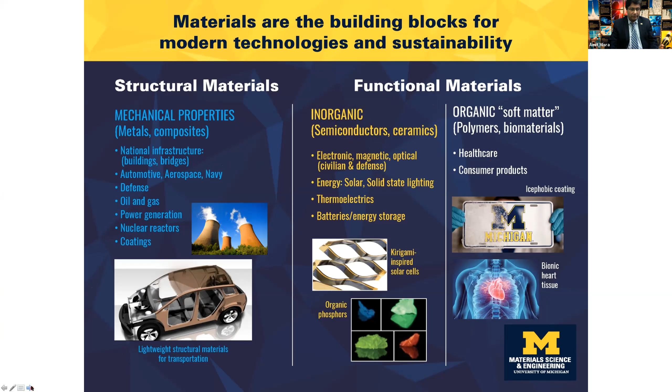So materials make a broad impact. Structural materials, metals and alloys, continue to be a hot topic of research for new kinds of developments in the field. If you just focus on the metallic alloy area, you will see high-tech applications wherever metals, coatings, and alloys are used.

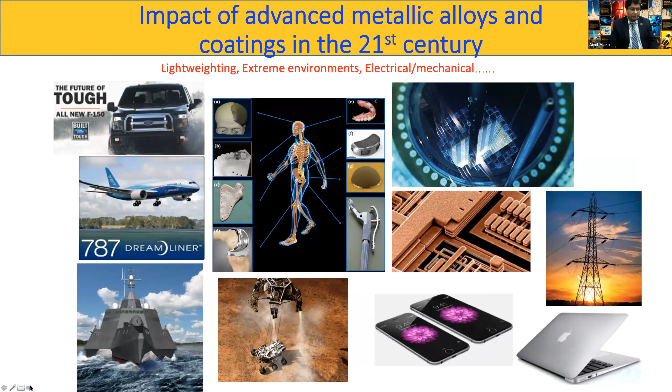That requires new kinds of research all the way from electronics to nuclear to biomedical to space to transportation. All of these areas require lightweight, high strength, damage tolerant types of materials, where microstructure and the role of microstructures becomes the key factor, which is the motivation for this kind of research.

What are some of the scientific issues? One good way to bring yourself up to speed, if you are not familiar, is that in any topical area of research there are these basic research needs workshop reports that DOE Office of Basic Energy Science puts out.

These are written by experts working in that field, academics that get together every few years or so. The relevant reports to the research I'm doing will be these, but you can Google DOE BES workshop reports and it will take you to a site where, in whatever area of research you're working on, you should be able to see the current hot topics of research and the fundamental scientific issues driving the kinds of research that DOE BES and NSF fund.

So for metallic materials, it is things like: how do you make structures that are strong and still lightweight? How do you make a hard matter heal damage or defects? And how do you make it resistant to failure under extreme conditions?

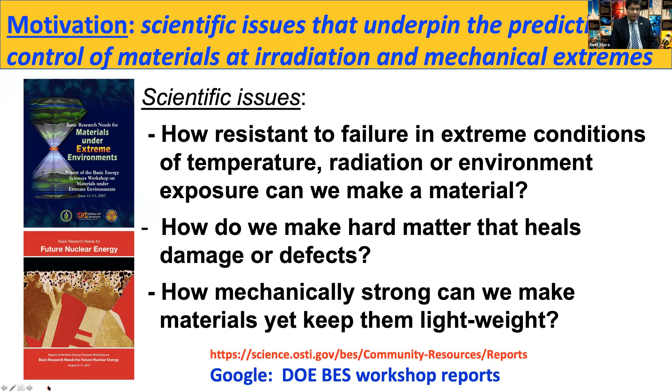A lot of metallic alloys can easily be fabricated, but once you put them under extreme conditions—high temperatures, radiation, or corrosive environments—they can fail in unpredictable ways. So there is still a lot of scientific basis needed to design microstructures for a tailored response that would enhance functionality in these extreme conditions.

So this is my outline. There'll be a little bit of background on microstructure and mechanical behavior relationship, sort of strength of metals 101, a few slides. Then I'll get into talking a lot about hierarchical structures. That will be my focus, different from some of the work I've presented before, made by physical vapor deposition in the form of thin films and coatings.

The second example is laser rapid solidification, relevant to additive manufacturing, where I'll give examples of how to make nano hierarchical microstructures in aluminum-based eutectics. And since there are students joining, we'll also throw in some quizzes as we go along, just to make it fun and interesting, hopefully.

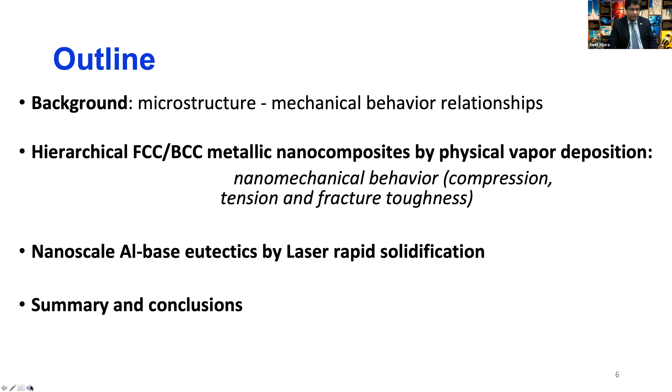So when we start with metal—this is outside my office window, there's a metallic structure, 3 cubes, and I work in cubic metal, so I always look at it and point to students. You can look at a macro structure on the surface of a metal, the way it is polished and prepared. But really what determines the property of a microstructure of a material is defined by things such as the grain size and the grain orientation.

So this is a textbook type of placeholder microstructure of a metal, where the different colors represent grain orientations, and this is a scale bar. This is a microstructured material with grain size in the tens of micrometers regime.

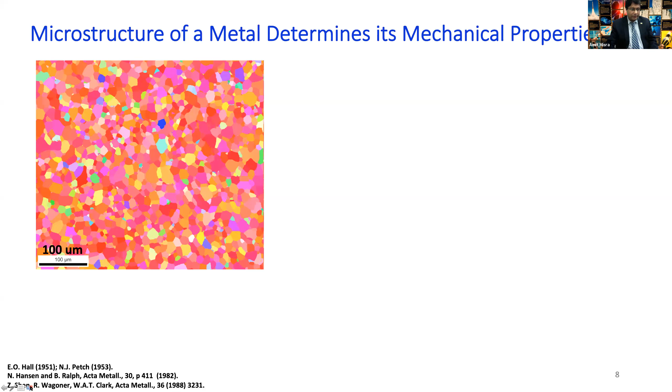And by this model known as the Hall-Petch scaling law, it is known that the yield strength of this microstructure will scale with 1 over the square root of the average grain size. Using that, we can get an idea of what the strength of a metal will be.

This is an example for copper. If you plot the strength as 1 over the square root of the grain size, you get a linear relation with slope K, which is the Hall-Petch slope. And you get a sense of what the strength numbers will be.

Typically on the order of a couple hundred megapascals, if the grain size is on the order of tens of micrometers, which is where most typical metallic microstructures are.

The reason for that is based on dislocation theory: crystals deform by moving dislocations on crystallographic planes. Dislocations tend to pile up at grain boundaries because there is a crystallographic misorientation. So the smaller the spacing between grain boundaries, the stronger the material becomes, because the grain boundaries are obstacles for shear or glide of dislocations.

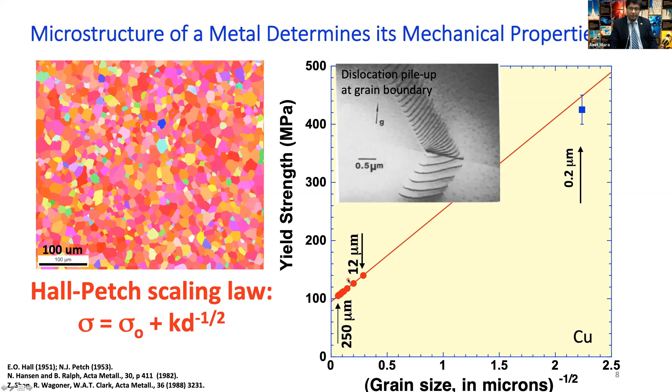Using this kind of idea, this has been used to refine microstructures to increase the strength. But of course, there are limits to what one can do with this. So I'll give you an example of how you can have a composite microstructure. The previous one was a single phase microstructure, like pure copper.

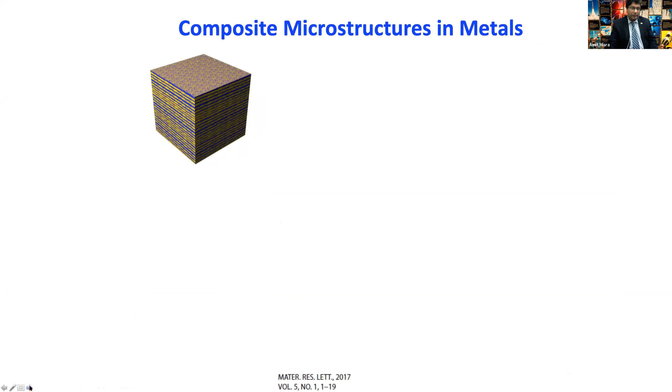In this case, you can create a layered, nanolaminate type of structure by layering 2 different materials. There could be both metals, or one could be a metal and one a non-metal, creating a composite microstructure. This is an example from copper niobium—copper is face-centered cubic, niobium is body-centered cubic.

You see this superlattice kind of structure formed by physical vapor deposition, where each individual layer can be controlled by deposition. This is on the order of a nanometer, but by deposition we can make it whatever dimension we'd like.

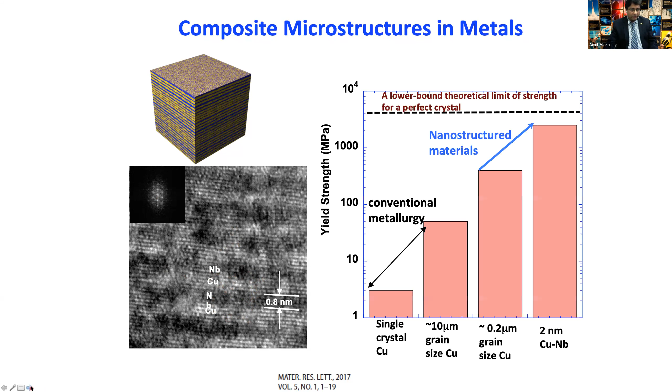In copper-based materials, that is extremely high strength, because you can normalize it with the modulus, and you'll see it's beginning to approach within a factor of 2 or 3 of what would be a lower bound estimate of the strength of a perfect dislocation-free crystal.

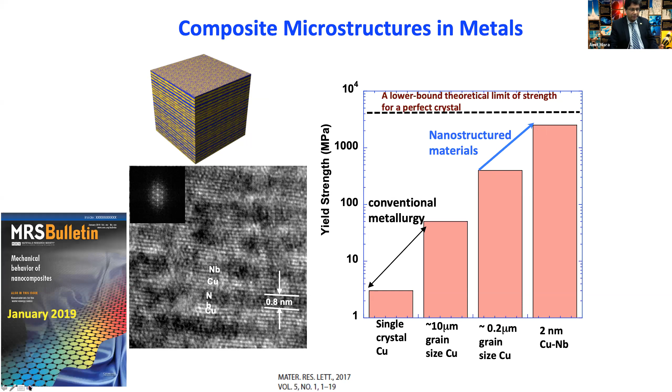So with this approach of making composite microstructures with finely spaced interfaces that block shear by dislocations, one can make super strong materials that are resistant to plastic deformation. Some of this you could also read in more detail in the recent MRS Bulletin, January 2019 special issue.

Going beyond high strength, there are many other properties discovered by virtue of these interface boundaries. You can suppress dislocation cell structure formation and obtain high fatigue strength. These boundaries can soak up point defects—attract, absorb, and annihilate them—resulting in materials resistant to radiation damage. You can also maintain the crystallography of the interface during plastic deformation.

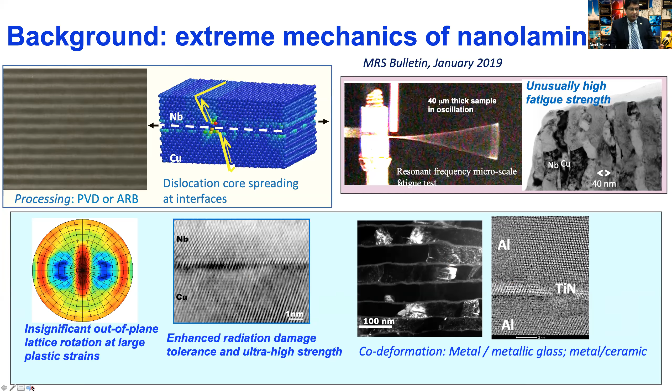Extend these ideas to metallic glasses or ceramics sandwiched between nano layers of metals and get high strength and high deformability. There's been a field of study looking at these kinds of laminate microstructures, utilizing the nanoscale dimension as well as the properties of the interface.

One limitation is that as this material becomes so strong, at the point of yield—this is a 3 nanometer multilayer deformed inside a transmission electron microscope in situ—you saw that a shear band nucleated at the point of yield, creating a huge load drop. This means that when the layer thickness is only a few nanometers, we have dislocations sliding across the interface, so once plastic deformation starts, it localizes where it starts.

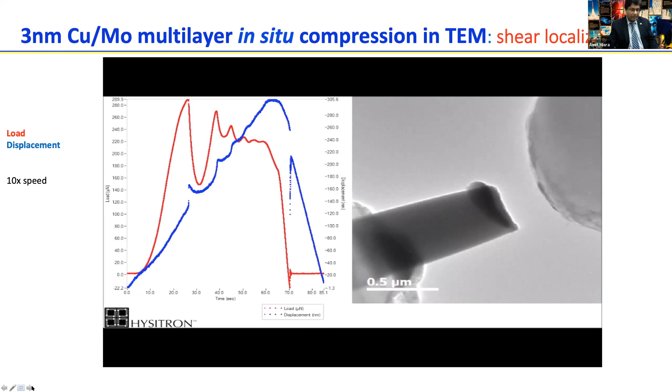That shear localization limits the ductility and toughness. To summarize, what we've known from the literature is that you can create an AB, where A and B can be two different metals or alloys, as a nanolaminate microstructure, and get very high yield strength, but the strongest, finest microstructures lack uniform deformation—they lack ductility and toughness because the mode of deformation becomes shear localization at yield.

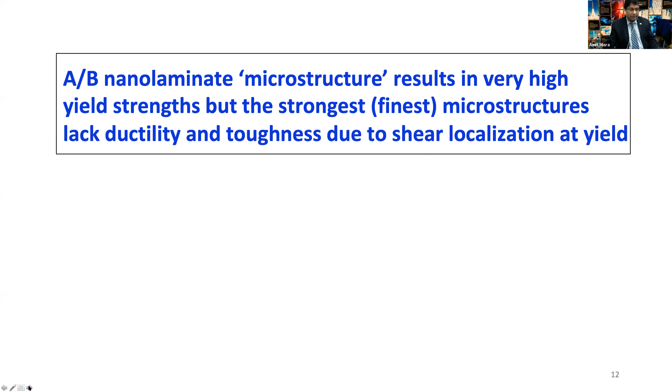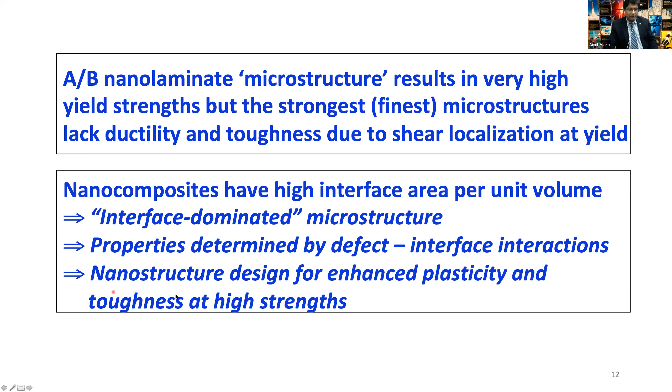We also recognize that these nanocomposites have high interface area per unit volume, so we have to think of this microstructure differently. Instead of a size like grain size or layer thickness, we have to think of it as microstructure that is interface dominated, because it's mostly interfaces, and the properties are determined by this defect-interface interaction. This means there's a need to design these interfaces to enhance plasticity and toughness while maintaining high strength, which is a new direction of research in this field.

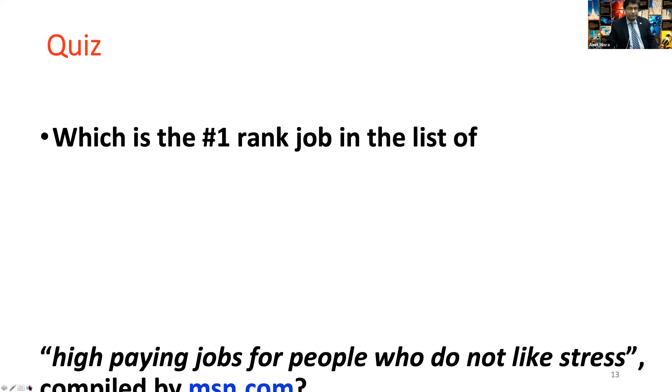So this is my first part, and at this point I will throw in a quiz just for fun. All the students who are listening, you can write down the answer in the chat.

What is the number 1 ranked job in the list of high-paying jobs for people who do not like stress, as compiled by MSN.com? This is just for fun, so hopefully while I get a sip of water, you can think of and write in the chat what you think the answer is.

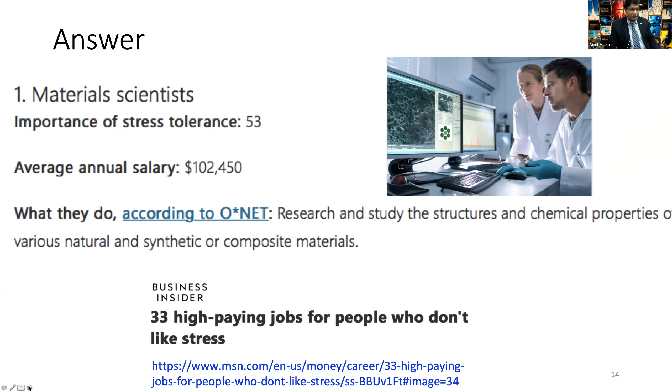So we have one response. Okay, you can also Google it. If you Google MSN.com, high-paying jobs for people who don't like stress, number 1 is material scientist. So you could go read more about it and feel proud that you are a material scientist by this criterion. This was released this year, ranked at the very top. This is something we show to the students. So hopefully with that, you can be energized to stay awake for the rest of the presentation.

So now I will talk about the next part. I introduced the idea of nanolaminate microstructure. I will now introduce the idea of hierarchical microstructure. What do we mean by hierarchical? How is it made and what interesting properties does it have?

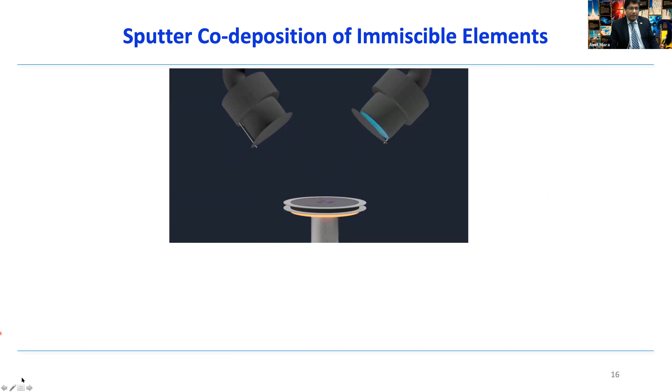To make that structure, we use a different approach. Instead of layer-by-layer deposition of A, B alternating, we mix A and B together—co-deposition—done at elevated temperatures using elements that are immiscible, such as copper and niobium, and similarly others. If you force these immiscible elements to mix at elevated temperature, there is instantaneous demixing, which can produce other kinds of morphologies beyond just the regular laminate geometry we get by sequential deposition.

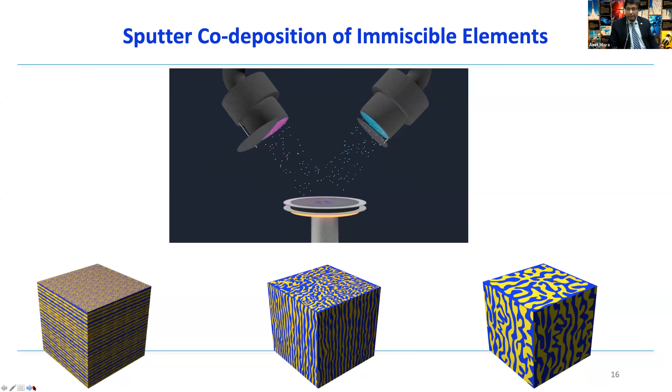The model systems we'll use are copper as an example for FCC, paired with a body-centered cubic element—such as niobium, molybdenum, tantalum, tungsten, chromium, vanadium, or iron. All of these are body-centered cubic elements, and many are refractory elements. The key is that all of these, if you look at the phase diagram of binary copper with iron, or copper with moly or niobium and so on, are immiscible and have positive heat of mixing.

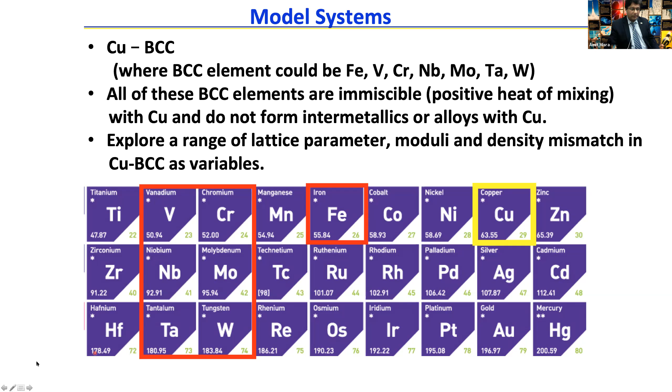So there is no alloying and no intermetallic formation. You can take any binary pair and mix it at elevated temperature, and it will demix instantaneously and create some kind of morphological pattern. The question is, what kinds of morphological patterns do we get? How do we understand it? And what are some of the unique properties we get from those morphologies?

This is work by Kumar Ankit, who could probably give a seminar on his phase field models of evolution of nanoscale morphologies during phase separation. The idea is that one can produce different kinds of modulations. All of this is in the system copper and moly by co-mixing at elevated temperature and sputtering, where we get instantaneous demixing. So you can have vertical striations, or lateral, or random.

This is simply a competition between the rate of mixing, determined by the deposition rate, and the rate of demixing, determined by interdiffusion. At elevated temperatures, depending on the two elements, one element diffuses faster than the other, so you'll see different kinds of patterns that evolve. All of these are nanoscale, and the shape changes.

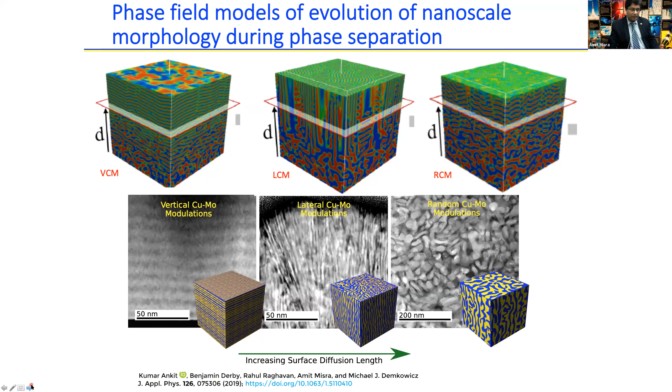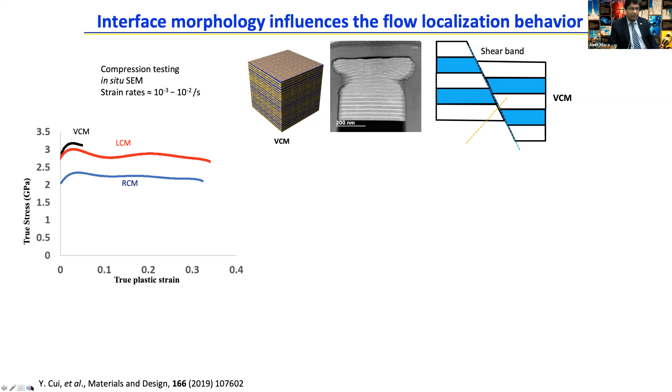The question would be, how do the properties change? We see a very significant effect on compressive behavior - this is all compression, I will show other tests later - based on the morphology, for nominally the same length scales. It's not possible to have exactly the same, but for nominally the same length scales, you see different morphologies have very different stress strain response and very different deformation modes.

The one at the top, the vertical concentration modulation or multi-layer structure, is what I showed before in the in situ deformation. Very high strength, but at the point of yield, it just fails by shear localization. Because once you start pushing dislocations across and cutting across the interface, you localize a shear band. So it is very hard, but does not propagate plasticity across.

In the lateral concentration modulation, we see a behavior characterized by these kink bands - you form these nano kink bands. So you get plasticity, but not much strain hardening. Whereas in the random concentration modulation, which is like a bicontinuous intertwined morphology with two phases continuous all the way across, this is the case where we are able to spread plasticity all the way across the 3 dimensions. As a result, we are able to maintain plasticity across the material and not fail catastrophically.

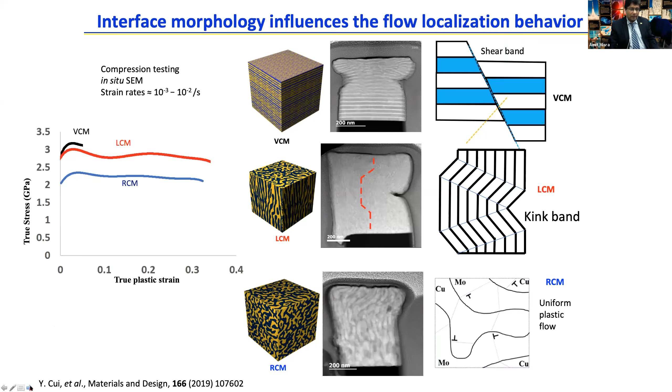So there is promise in changing the shape and not just the size for a given material composition. Now, going beyond, the question we would ask is: all of these I showed, going from 1 dimension to 3 dimension, the length scale is still constant. So you can define it by a shape, and you can define the microstructure by the composition modulation wavelength. But there is one concentration modulation wavelength that can define the characteristic length scale of the microstructure.

And the question was, can we introduce bimodal composite structures by deposition? Can you make it hierarchical, so that there are different length scales embedded inside, like many biological systems have, because that could in principle impart toughening in this kind of microstructure? And how do you do it - by deposition - and if you can, what kinds of properties do you get?

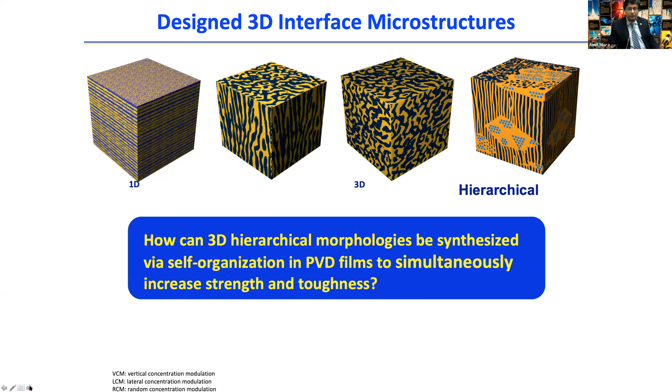Now, it turns out that purely by serendipity, my student was successful in discovering a structure that looked like this. And that has led to thinking about how to go back and make it by design. So I'll take a minute and describe this microstructure - it is hierarchical and has many layers of complexity inside.

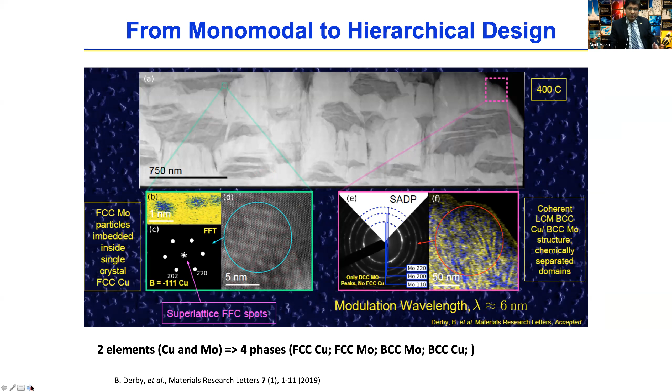One obvious question was how does it depend on the temperature? Obviously this does not form at room temperature, because at room temperature you just don't have enough kinetics to have phase separation. But if you increase the deposition temperature, does this structure go away, or is it stable?

So clearly there is structure forming inside structure. There is first a kind of phase separation, then phase separation inside that, and a different kind of phase separation inside the other domain. So a very bizarre and interesting kind of morphology is forming during deposition.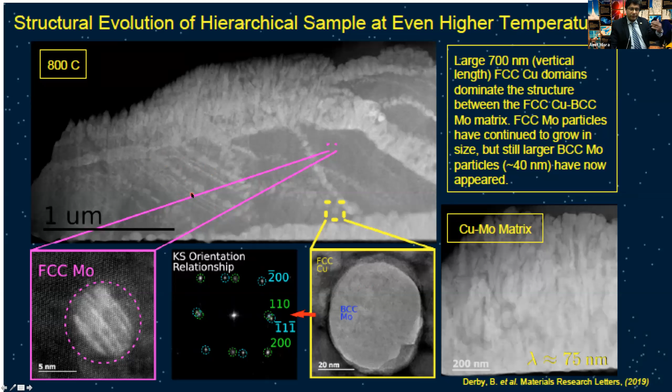So it is sort of structure inside structure, nanocomposite inside nanocomposite. Very interesting structures. The question is, what are the properties?

So first looking at the compression, that's the 3 nanometer structure that I showed before, the multi-layer structure. This hierarchical structure has a very pronounced elastic-plastic type of transition because the two composites deform in different ways. The copper islands that have those nano dots of moly have a characteristic stress strain response.

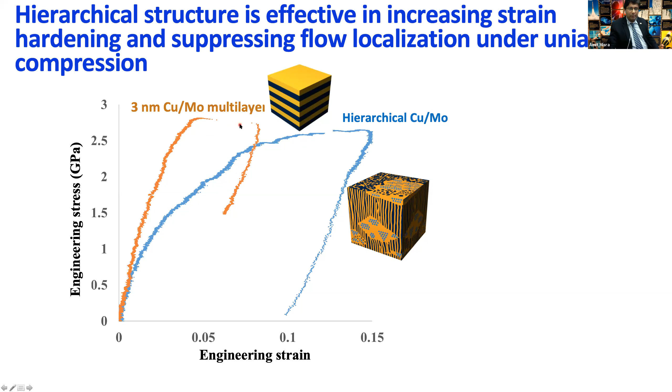The matrix that has the phase-separated copper-moly has a different stress-strain response, and what we're seeing is a composite of those two. So you're seeing where you go from elastic behavior to elastic-plastic transition, and then finally to yield — a very high strain hardening rate, which has been lacking in the regular multi-layer structure. By getting a very high strain hardening rate, we're able to get uniform distribution in plasticity, going from shear localization to more uniform distribution of plasticity at small scale.

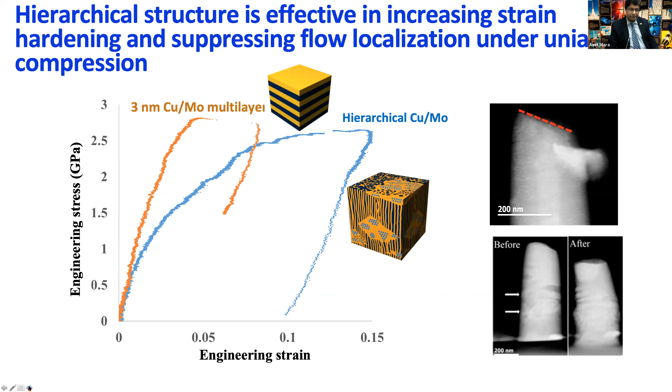We've also done tension tests. We can do a FIB lift-out and perform a tension test inside a transmission electron microscope, so you can measure the stress-strain response of the two different composites inside that hierarchical structure. This is the copper domain with nano moly precipitates — it has higher plasticity, so you can see that most of the plasticity comes from these relatively softer regions, though it's still pretty hard compared to pure copper. Whereas the moly-rich nanoscale region, which is very fine scale, behaves more like the multi-layer — very high strength but less uniform elongation. Together, they produce a much better composite response of strength and deformation.

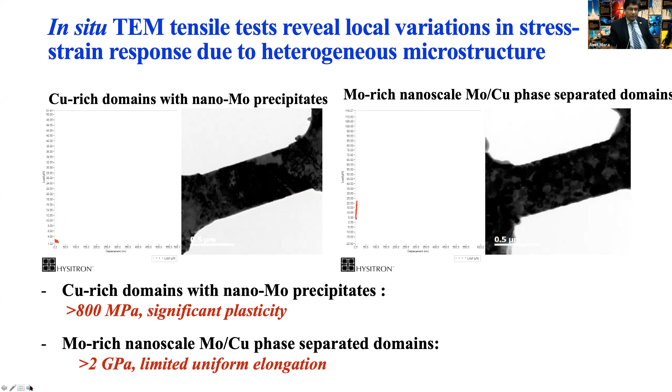So all of this was just uniaxial compression and then tension. One of the tests that was missing was a test that would measure some kind of crack growth response, which is difficult to do in thin films.

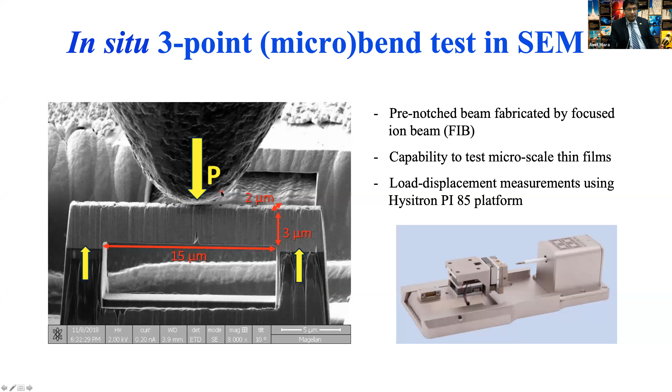So, in collaboration with a group at Los Alamos, we've done these kinds of bend tests where you grow the film thicker, up to about 5 microns, and then make a 3-point bend test sample, create a very sharp notch, and do the bend test in situ in the SEM.

This is a bend test in situ for a multi-layer sample, and you'll see that as soon as the crack formed at the notch, in just one frame, the sample fractured. There was no crack growth resistance — as soon as the crack popped, it failed in one frame.

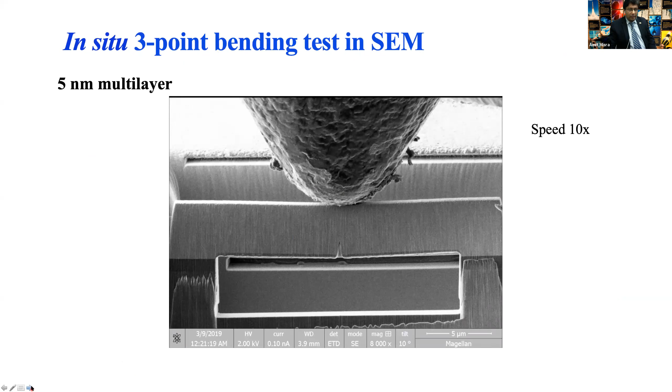There are expressions derived from similar tests done on silicon microbeams, where because the test is done in situ, you can measure the crack opening displacement. And since we know the yield strength, we can estimate the J integral, the strain energy release rate, which is maybe a better descriptor than K1 because of the significant plasticity at the crack tip.

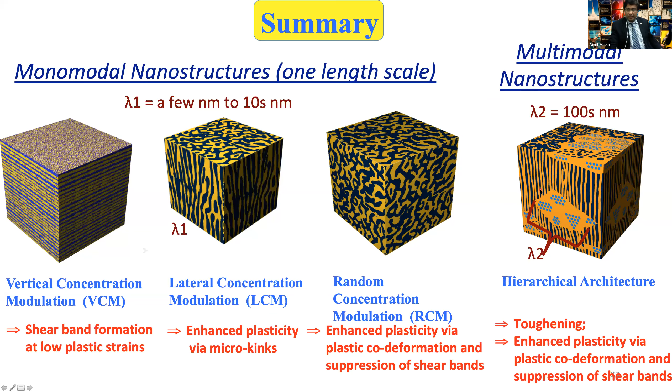By the time the lambda gets down to a few nanometers, there's limited microstructure design to enhance toughness. That required a very different kind of microstructure design, which we actually discovered by luck, and now we can go back and study in more detail. The hierarchical structure is more promising in enhancing toughness in these structures.

So this completes my second part, and before I go to the next part, there is one more quiz I'll throw in. All of you, faculty and students, maybe you know about this. I was thinking of what is common between Arizona and Ann Arbor, besides Steve Cross, who went from Michigan to Arizona. So here's a question: which top 10 list by WalletHub and CNBC, published in CNBC.com, features both Scottsdale, Arizona and Ann Arbor, Michigan?

And actually it also lists Tempe, Arizona. So feel free to write it in the chat. This is just for fun. Maybe you know it. Looks like a difficult one. So we'll go to the next.

This is the 10 best college towns of 2019. They have defined the quality of a college town by factors such as cost, social environment, like having a life, and academic and economic opportunities. Of course, college towns can be large cities, with population greater than 300,000, or medium size, less than 300,000 but more than 125,000.

So this is where you see Scottsdale and Tempe, both there. And smaller towns like Ann Arbor is in this list of towns less than 125,000. So again, something that university students may not often know, but it's very important to be living in a town where you have more than just academics. There are economic opportunities, it's an affordable place to live, as well as there is social life in that area. So it's very good to see that.

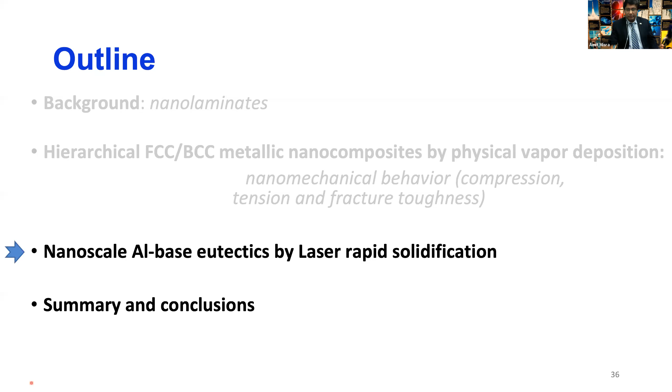Final thing, I'll make a change from vapor deposition. Vapor deposition is fine for thin films, for applications like coatings, but what about bulk structures? Can you get microstructure design kind of similar to what I just showed using bulk-like microstructure types of processing? This is an approach where we're again starting with things that naturally form two-phase structures.

That's the starting point. In the case of copper BCC, we picked immiscible systems. In this case, we are picking from phase diagram systems that are eutectics. Eutectic meaning that from a liquid phase, you form two solid phases simultaneously. Aluminum silicon is a very simple textbook example that we teach in undergraduate class. Aluminum copper is another very simple, well-known eutectic system.

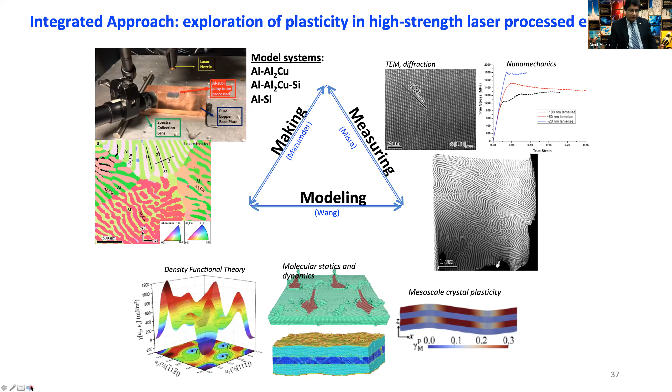What if you make it by laser melting, where you get very high cooling rates? There has been work done in the 1980s and 90s showing you can get very fine scale structures in these eutectics. But back then, we could not do a lot of in-situ nanomechanics and could not study the mechanical behavior and understand how to control microstructures. So this is a very active research area, and I'll show you one very simple example.

Most undergraduate material science courses introduce phase diagrams, and one of the best, most common examples is aluminum silicon—the easiest phase diagram you can think of, a eutectic. Aluminum and silicon do not mix. At room temperature, there is minimal silicon alloying in aluminum, and there's a eutectic at about 12.6%. This eutectic has this discontinuous structure of silicon.

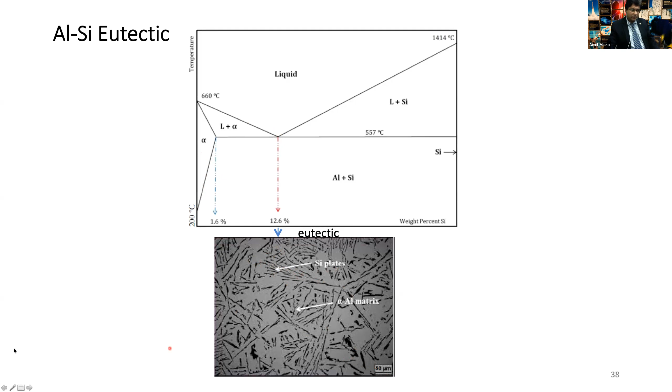It says plates here, but actually it's more of a flake-type structure. You see these discontinuous flakes that form. The scale is 50 micrometers—very coarse structure, not very useful, not very high strength.

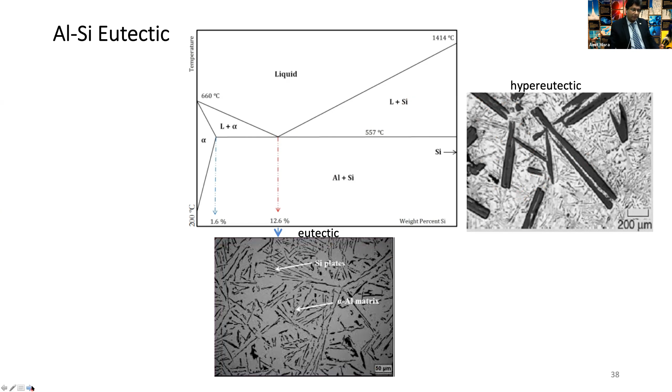If you go on the silicon-rich side, you get a hyper-eutectic structure. First, the silicon phase will form—you see those large dark regions, very coarse, very brittle silicon. In between, the remaining liquid will then solidify by this eutectic reaction into almost pure aluminum and almost pure silicon—essentially pure silicon, a very fine scale structure that can form here. But still fine scale meaning maybe 10 microns or so in that range.

What happens under laser is that the cooling rates can be thousands to 10,000 Kelvin per second, and the structure completely changes.

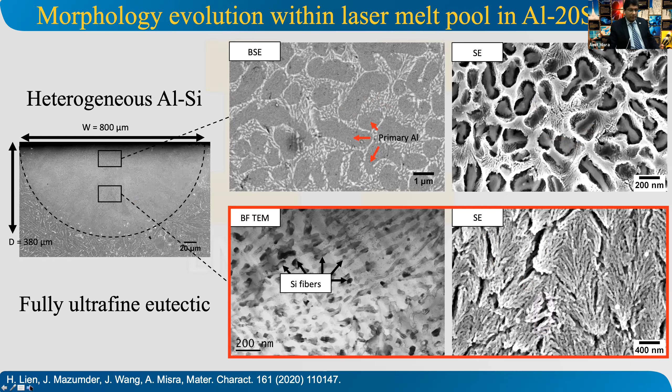We can go further and look inside to see the structure, which is very surprising. It's not just fine scale and different shape from flake to fibers of silicon. You have these domains or colonies, so it's not single crystal, but within these domains or grains or colonies, you have a regular eutectic structure.

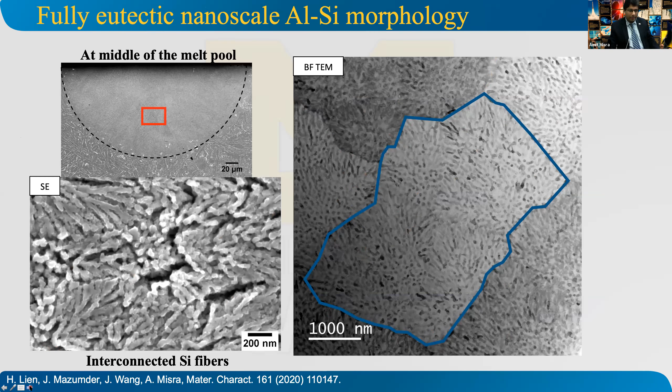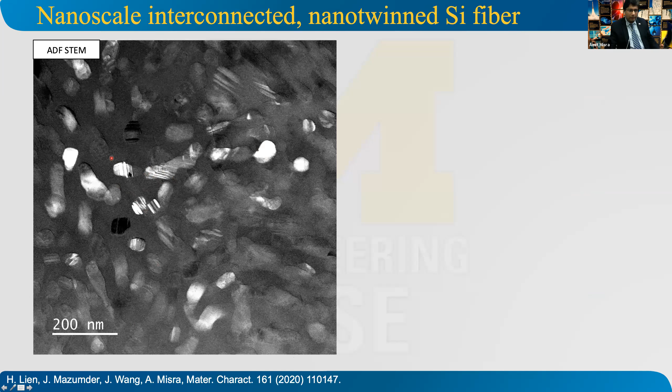What's also surprising is that if you look inside those silicon fibers that look interconnected, you see these faults, these dark lines inside those silicon fibers. When you do high resolution imaging and diffraction, it turns out a lot of these are stacking faults and twins. So inside the silicon fiber, as it is growing from a liquid phase in the eutectic, the silicon fibers are not defect free.

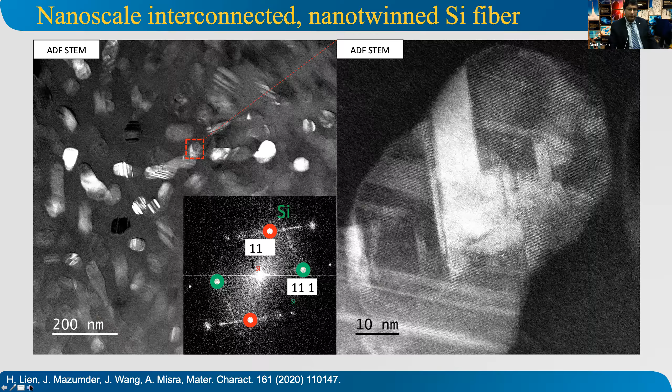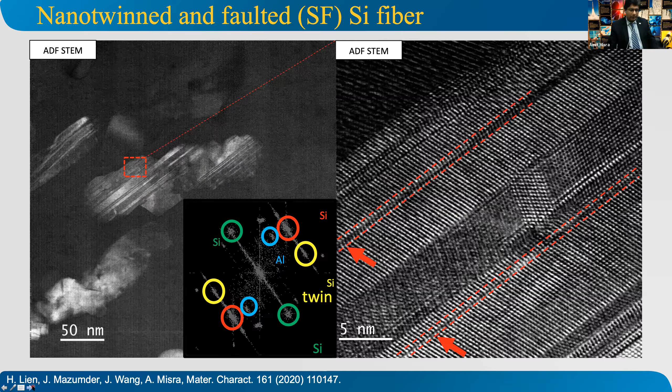They're actually growing in this twin structure. So this is a silicon fiber, and inside you see these planar contrast from these planar defects that are full of stacking faults and twins. So we have created a nano-twinned and faulted silicon fiber inside the eutectic matrix, inside that laser zone, creating a hierarchy of defects in that very simple composition.

In the other structure, where you get this two-phase structure with eutectic and primary aluminum, notice that this looks like a hypo-eutectic structure—that is, you form primary aluminum—even though the composition is hyper-eutectic. That's just an effect of far-from-equilibrium solidification. Very rapid quenching can do that. It can change what you would expect from an equilibrium phase diagram.

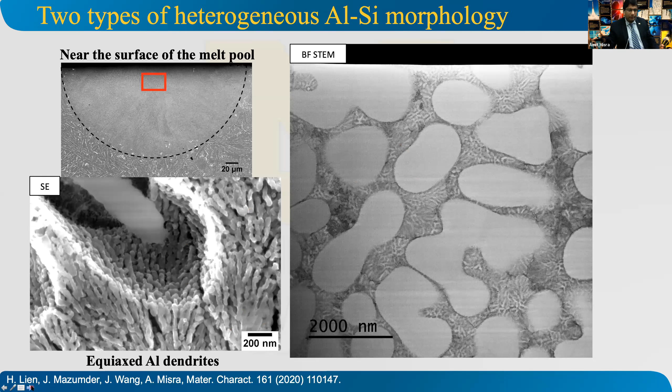But what's interesting is that sometimes inside those aluminum dendrites, you start to see these fine precipitates. Those turn out to be silicon precipitates. We only have two elements, aluminum and silicon, so that's what will form. So you get silicon forming as these fine precipitates.

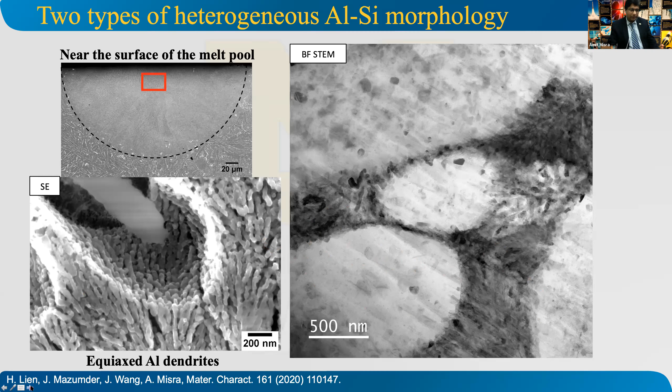So this is beginning to look like the structure I showed for copper-moly, formed under very different processing conditions, but it is hierarchical in nature. You have a matrix defined by a eutectic structure, in this case of aluminum-silicon fibers, where the silicon fiber itself is nano-twinned, and having these islands of coarse aluminum dendrites that internally contain silicon precipitation. So this is just showing that you have silicon precipitates.

So just to summarize, from the same composition—that's the key point—we did not change composition. There's maybe a subtle change in the cooling rate in terms of where we saw the structure with respect to the free surface. Maybe some of these are forming at a higher cooling rate than the other, but this is very different from the regular eutectic structure that you will form under melting.

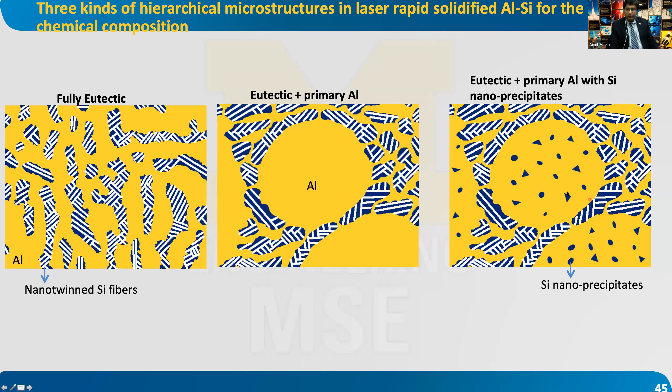This is different in many ways. One is that silicon shape has changed—it has become fiber. Second, it's very fine. The very fine part was expected. The part that was surprising was the nano-twin structure and the fact that in the aluminum dendrite, you see these very fine silicon precipitates. What does that do to the properties?

I will only show the compression results. We are doing tension and will do other tests, but it's very interesting that if you compare with the regular aluminum silicon textbook eutectic structure, it has very low strength, about 200 or so MPa. And even in compression, you don't get much plasticity in it because silicon flakes that are tens of microns are brittle and there is no plastic compatibility. So you get brittle fracture, limited deformation, even in compression.

But what's happened with these kinds of structures—the three microstructures that I showed in the previous slide—are shown here in the schematics, and the red box shows the fully eutectic structure with nano-twin silicon fibers.

That's the best behavior we are seeing, the strongest material, but also high strain hardening rate, which leads to stable plastic flow. I think that's the key part, as you see in this slide showing the strain hardening rate is very high, which prevents flow localization. It prevents strain from localizing at the onset of yield, so the entire sample can begin to yield.

The heterogeneous structures are a bit weaker because, as you would expect, the aluminum dendrites have lower strength. But in compression, we are not able to tell the difference in the true plasticity, so we are doing tension tests to study that.

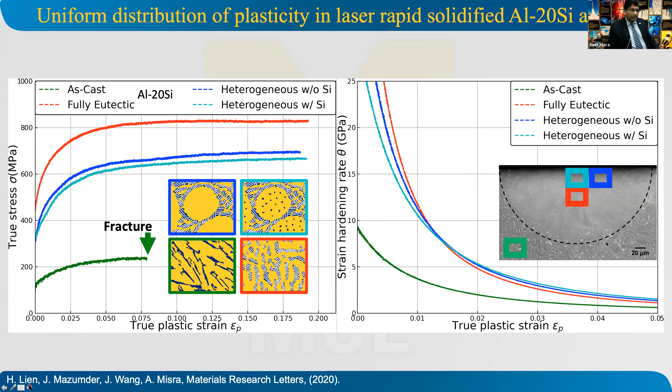So again, this is very promising. This shows when you compare the behavior in compression, the as-cast material, which was not laser refined, showed brittle cracks forming during compression, right at the point of silicon flake where aluminum is plastically deforming but silicon is not, leading to failure. But under heterogeneous or fully eutectic structure, especially fully eutectic, you see signs of more uniform deformation. In the heterogeneous case, on the surface you have aluminum dendrites that deform more, showing some extrusion at the surface.

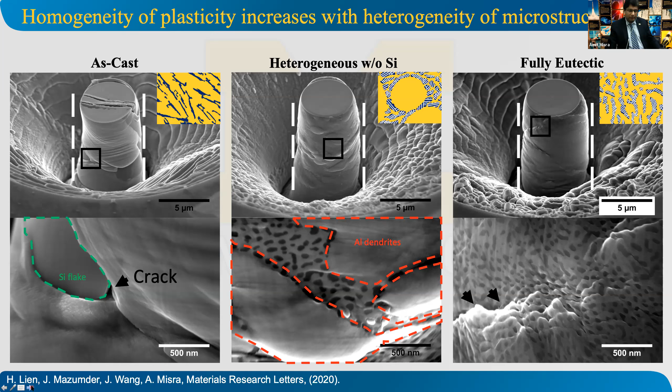But generally, for the fully eutectic structure, the homogeneity of plasticity increases with the heterogeneity of microstructure. That's the punchline here, and the surprising behavior: by making the structure more heterogeneous, we are making plastic flow more homogeneous at very high strength levels.

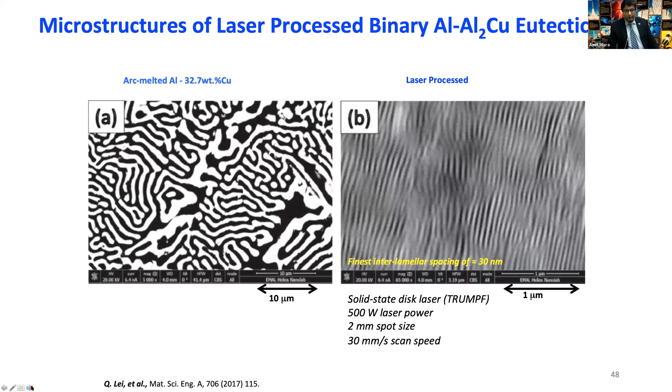Similar behavior is seen in the other eutectic of aluminum-copper, which is more surprising because aluminum-copper has a tetragonal structure, not cubic—silicon at least is cubic. Here also we see something similar: as the structure gets finer, it's not only stronger, you get more plasticity.

More importantly, the distribution of plasticity, seen from these very fine scale slip bands, is distributed uniformly. The plasticity gets distributed uniformly, which is very promising because it suppresses the kind of localization that is often the bottleneck with high strength nanomaterials.

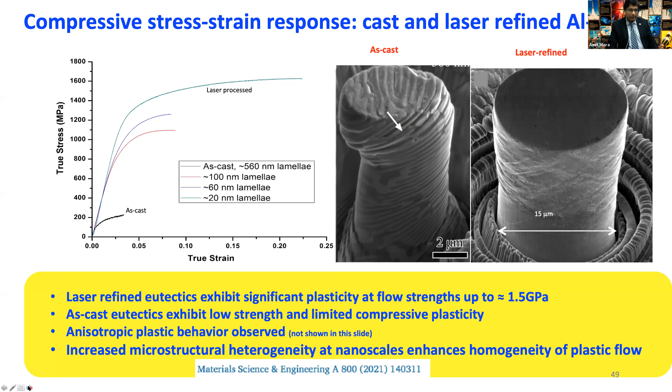So this brings me to the summary of this part: these laser refined structures have been known in the literature to have fine scale structures from laser melting. What is new is that by doing nanomechanical tests, especially in situ, we are able to see that increased microstructural heterogeneity at the nanoscale enhances the homogeneity of plastic flow while maintaining very high strength.

In fact, you can increase the strength and increase the plasticity because you are able to somehow make the hard phase co-deform with the soft phase, as well as increase the strain hardening rate.

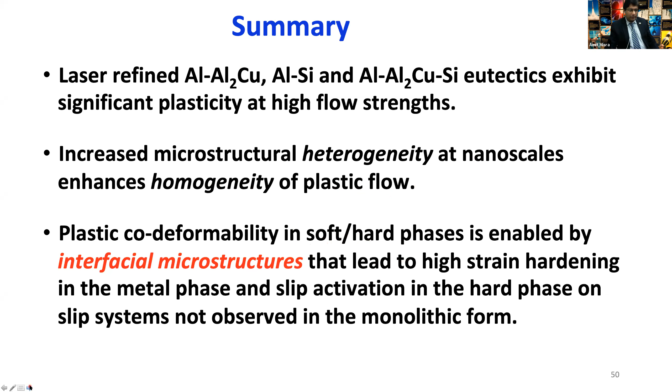So with that, I think this is my last slide. I'm going to stop and say that microstructures are the key. Regardless of what kinds of materials you are studying, the properties are driven by the microstructures and the defect microstructures, going way beyond the chemical composition.

Even with the same chemical composition, we can change the microstructure, which traditionally has been studied primarily by a single parameter such as grain size or texture. We can now begin to bring in the shape and the multitude of shapes, and the hierarchy of interfaces and defect structures, which is again a very promising area for material science in this field.

And we have shown these with different processing techniques. I only talked about PVD and direct metal deposition. It has also been seen in severe plastic deformation, which I did not have time to talk about.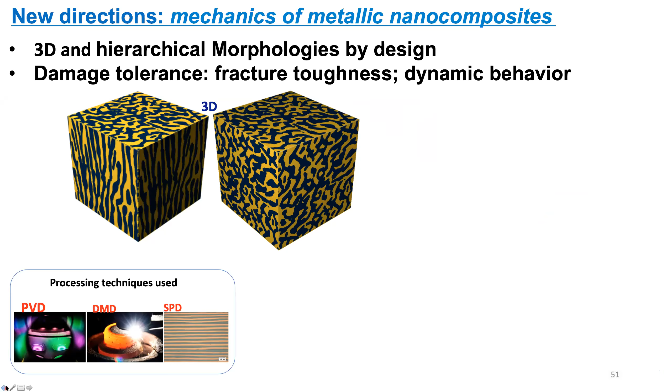Computationally, can we do that? Are we doing that? That's a very good question. I have asked my collaborators to work on it. They have to create a model in the computer, but that has not been done yet.

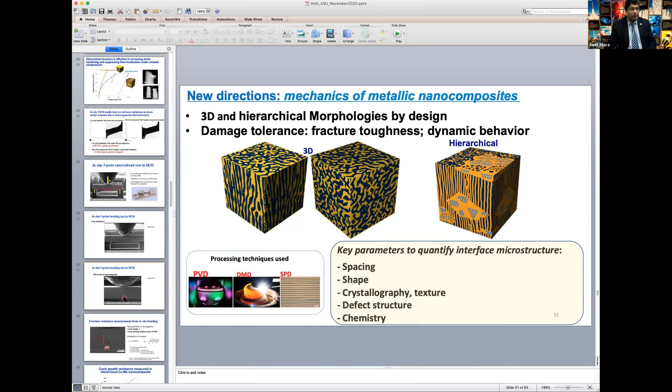But yes, we are tracing it because the test is in situ. So let me go back here. This is the in situ test.

Now, the way this surface is prepared, this is as FIB cut, so in this case we don't see the contrast from the two structures. If I play that movie again, you'll see the crack will form, and you'll see the crack is not able to propagate—it will just jump from here and there. It shows the structure is tough, but it doesn't show exactly what you're asking, which is can you track it going from one composite to the other, because I don't see the contrast on this image in situ when we are doing the test.

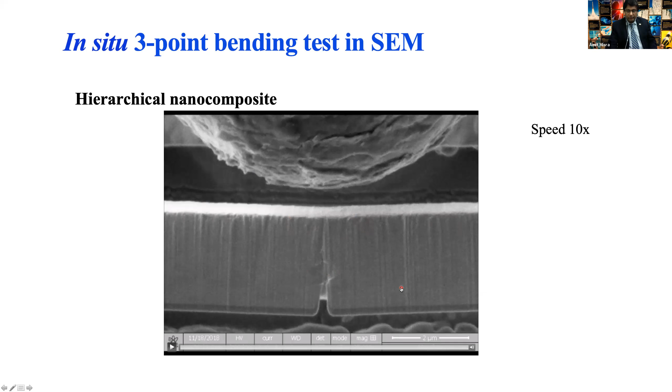So what we do is, when the test has stopped because the sample did not fail, we section this with FIB and take the foil out and put it in TEM. That is shown in the next slide here.

So this is one way where we can track it. This is how the crack progressed, and you can see as it is going from one microstructure to the other, how the crack opening changes. From here you can discern what the possible strain energy release mechanisms are—you see more crack bridging from the relatively more ductile copper island phase, and where there's some crack deflection along the interface, also the copper-moly interface, and the crack was able to jump from here to there.

But what's needed is that for each of these we have to compute to understand which is more important. We have to find a way to compute each unit process and then do the full simulation if we can. This will be very exciting for someone to do, but my collaborators are working on that. A very, very good question, very insightful.

Thanks a lot. Okay, so the next question is from Jagan. Yes, Jagan, go ahead—very interesting talk. I had a quick question, actually two questions.

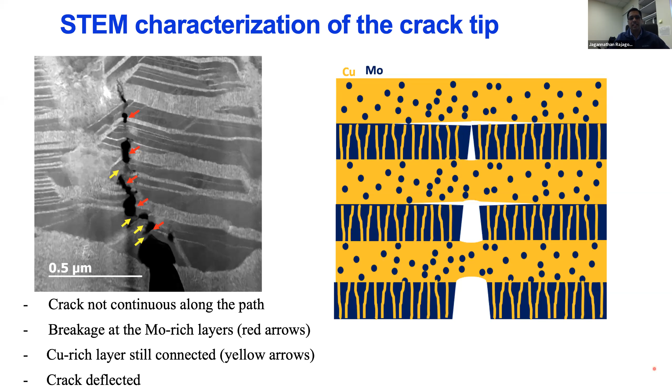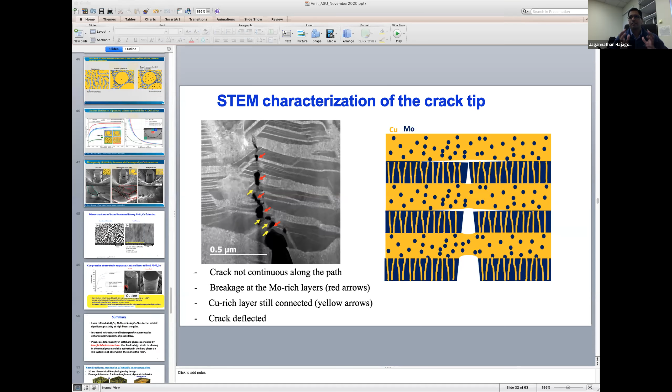When you looked at the aluminum silicon eutectics, the microstructure where you had the silicon particles within the aluminum kind of blob, so to speak, it seemed to have a slightly lower strength than the other one, which doesn't have this, right? And that is kind of surprising, isn't it?

Yeah, that's a good point, we are trying to analyze that in more detail to get more statistics. The initial thinking is that those silicon particles in the samples we tested were coarse, so we think they are not doing much in terms of precipitation hardening, and that's within the scatter range for doing these tests. So we have to find a way to make those silicon precipitates finer.

We just don't know how, in terms of what knob do you turn in the processing, because the hypothesis is that in the primary aluminum dendrite that formed, some silicon was trapped, and because silicon is not soluble, it precipitated inside.

If you could control that somehow, it may not be possible. Maybe with laser, we are working on it, but there's no science behind how to do it. So they are doing it empirically in terms of how you change the scan speed, the power, and the spot size to be able to get down to this level of microstructure. But again, that is kind of more general.

It's like how stable are these microstructures, right? You can make them, but how do they respond to stress or temperature changes and so on? Which one, the aluminum silicon? All of them actually, the ones we showed for copper molybdenum all the way to this thing. Some of the copper moly stuff is deposited at high temperatures, so you would have expected that they will probably remain stable. But these aluminum silicon eutectics that you laser melt, how stable are those?

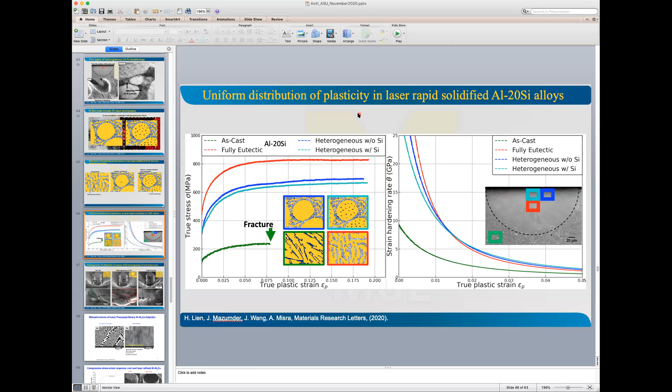So my question was that typically it appears that with the laser surface treatment, it seems like this would be a replacement for, say, applying a film on the surface. So instead of coating something with a material that is stronger, you would just modify the surface with this laser treatment to make it structurally more sound. So my question was, have you considered instead pulsing a lamellar or layered non-hierarchical film with laser to see if it reintegrates into a hierarchical structure? Just to see if something that is already decomposed can again reintegrate into something hierarchical.

Yeah, that's a good question. We have not done that, to see how you can change morphologies by subsequent laser treatment of different kinds of pulses. Very good question. Yeah, I think that's also an area of research.

And with regard to, again, a lot of, as I said in the beginning, this is funded by basic energy science and NSF, so it's all very basic science. In terms of application, it can be applied in many ways. They do laser cladding, they're also doing it with powders. They can deposit a surface layer and create, they just have to learn to understand the microstructure better in terms of what they'll get. There are many ways in which we can do surface treatment with laser, or you can deposit a layer, and there are a lot of different things they can do, where I think it will have more short-term applications.

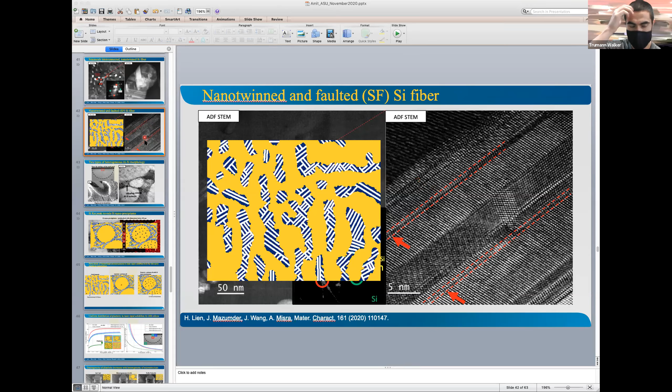I was wondering if there was any pattern in where these different phases are appearing within that melt pool region you showed, and whether there's been an effort to measure the distribution of each phase within that melt pool region.

Yeah, that's a good question. That's exactly what we are working on now. We are going back and characterizing a lot more of these melt pools under different conditions to understand why you get these different morphologies. We've been able to nail it down that there are 3 distinct morphologies. It seems the fully eutectic, shown in that red box, is in the middle or lower part of that pool, where the cooling rate might be slightly lower. Near the surface, you'll see more of the hierarchical structure with the aluminum dendrites.

When we get those silicon precipitates, it's still not known. I think there's a lot more work to be done to relate the structure to the property, but also relate the structure to the processing, because we don't know the cooling rate. We can't measure it directly, so they are doing calculations of the cooling rate in the melt pool. There's a lot more work to be done there. So thank you for your question. Thank you.

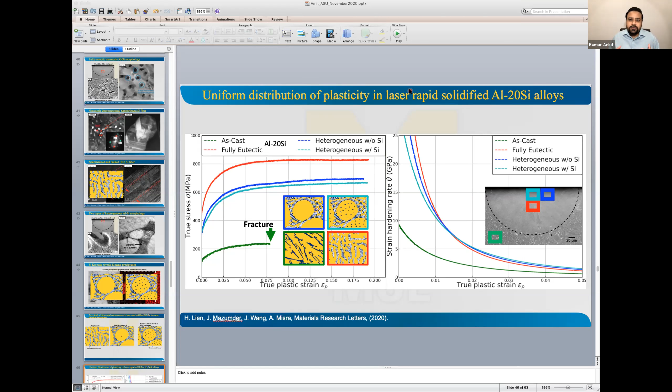So we don't have any more questions coming, so let me ask one last question, a topic I've been interested in all this way through. Amit, I think I've asked you this before, but let me put it differently. I was always fascinated about the substructuring that goes on in copper. You have these copper-rich islands and the moly, which sort of self-assembles into a substructure. Do you think this will change if we were to talk about a more conventional system like copper-nickel, where both crystal structures are FCC?

That system can actually undergo spinodal decomposition, as opposed to being immiscible. It depends if you can get a majority phase. I think what's happening in the island is that they're copper rich, and whatever moly is trapped is a minority phase, maybe 10% or so, so it cannot form the stripe pattern, so it's forming these dots. So if you can find that kind of composition, it should be possible in any spinodal system. So it occurs at a very asymmetric composition.

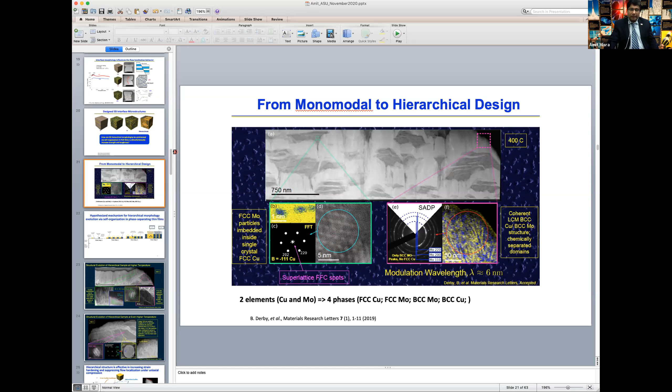That's what I think the idea is, that if it's asymmetric, you can have this kind of pattern. But why is it so regular? And why does it go from this to linear? You have these dots that are lining up, forming a linear arrangement. When does it form a linear row of dots versus a three-dimensional arrangement of precipitates? And those are also different kinds of spinodal structures inside.

So the length scale isn't something a phase field simulation would predict—this is an atomistic scale defect or substructuring you're looking at. Do you think a method like KMC, or phase field crystal, would work much better in this context? It could be, yeah. Although phase field could be tried independent of length scale, just to see how the morphology would change with different composition—if it was not equiatomic, if it was asymmetric, then what kind of pattern would form.

You can even create an alloy and then age it or heat treat it. It doesn't have to follow what's happening in deposition. We think what's happening in deposition is a two-step process: first you create the moly-rich matrix and those copper-rich islands, and then as deposition continues, there's further microstructure evolution inside those separated domains. So it may be possible to take a copper grain, mix some percent of moly homogeneously—5 or 10%—and run a phase field simulation to see how that evolves, independent of length scale, to see what you get.